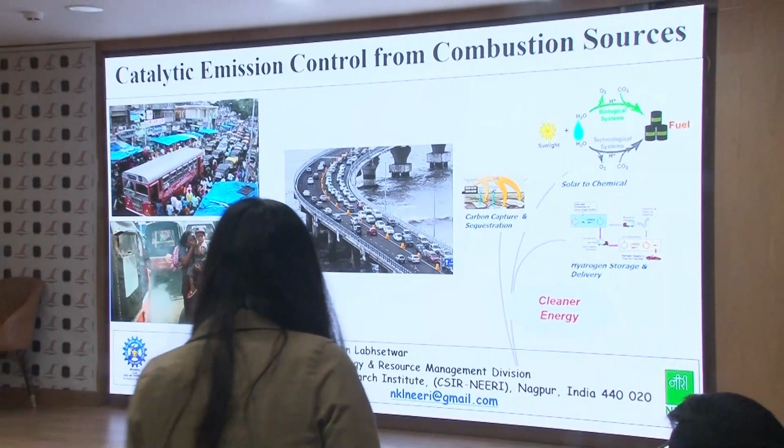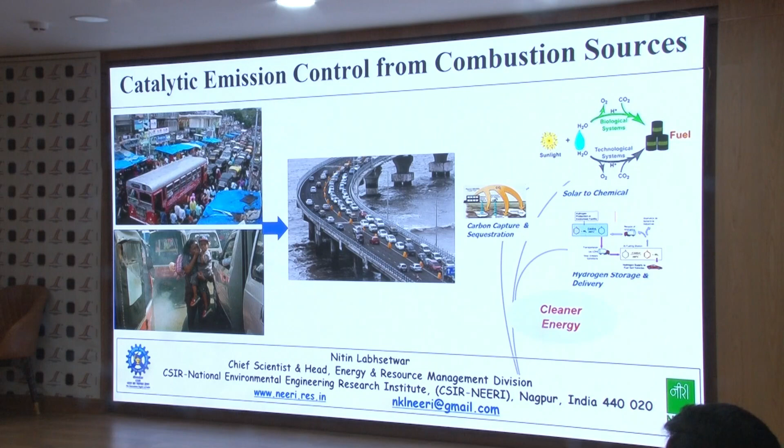And my presentation is influenced by two things. One is I had some discussions with my dear friend Avinash, and we were discussing that we should also encourage the collaboration from my institute. So I changed my presentation towards introducing what my other colleagues are also doing, number one.

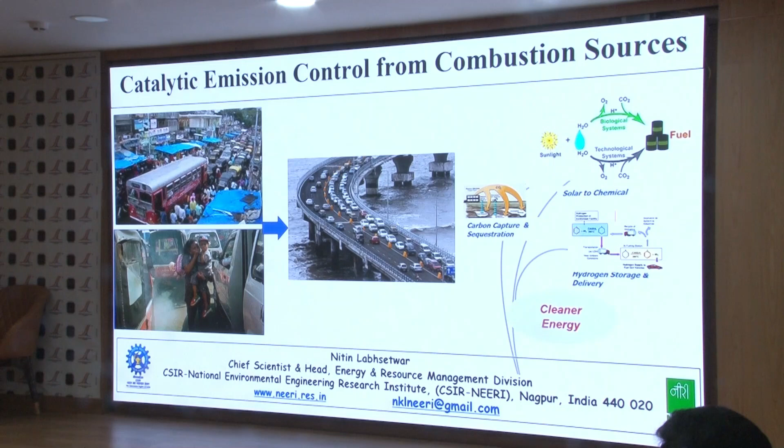And number two, I believe in two kinds of collaboration. I am a material scientist, worked on catalysis, so I collaborate with catalysis scientists, and other collaboration like with Professor Avinash, wherein we look for the complementary expertise. So that's why I haven't written anything on my sheet, but we'll take care of mostly emission related things. So this is what my perception will be from a point of view of my institute.

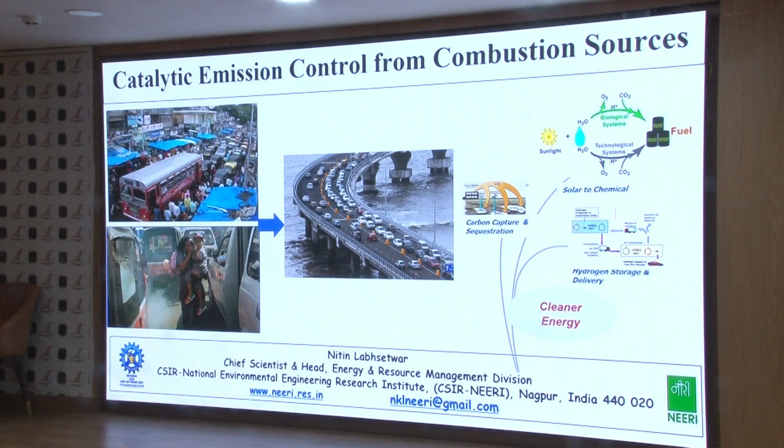So my institute, I'll very quickly introduce as an environmental engineering research institute, wherein we are working on different aspects of air pollution.

We can continue. We are trying.

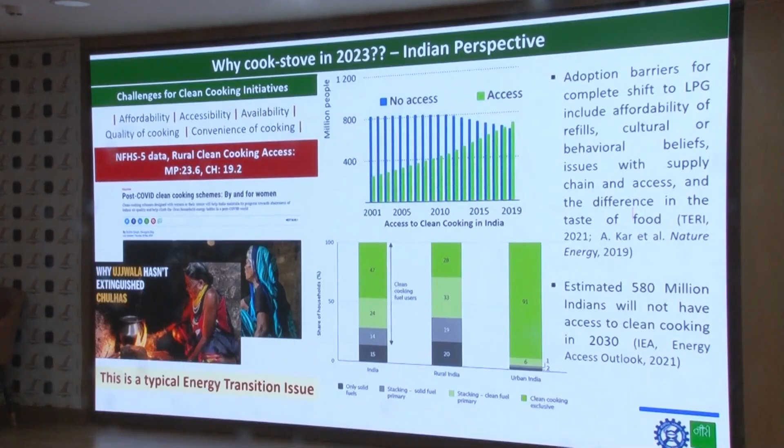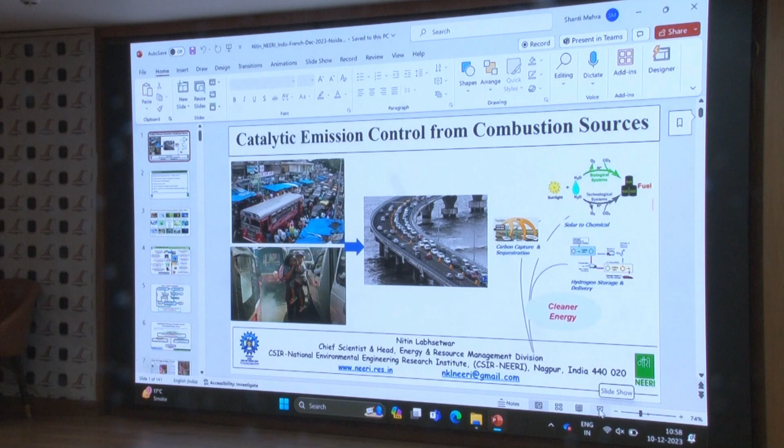Or not very specific to the automobile emission control. So I would like to show you what we feel as a neutral person or as an expert in the area of environmental engineering or air pollution control, not exactly the automobile pollution control.

Fine, it works fine. Thank you.

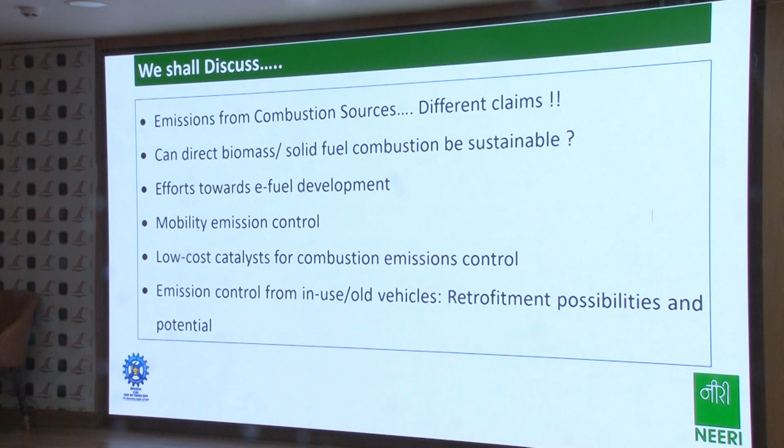So recently we started looking into the emissions from combustion sources, and interestingly there are different claims. Second, can direct biomass solid fuel combustion be sustainable? Because I'll show you the reason. Efforts towards e-fuel development at my lab and the mobility emission control. This is the area I extensively work on in fact. And we have done two interesting studies to check the emissions from the old vehicles.

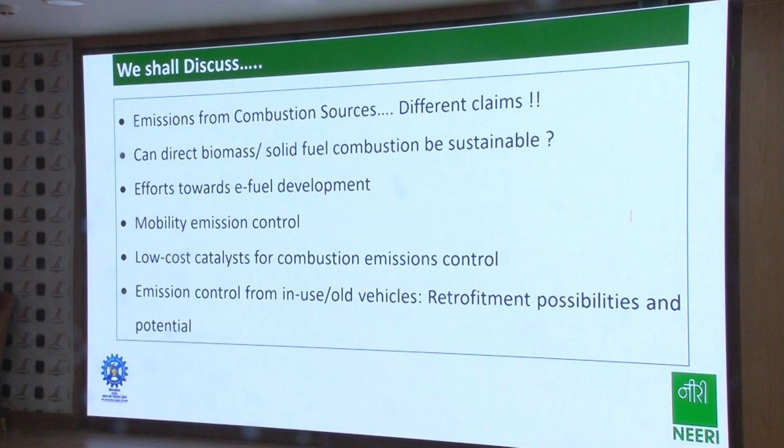So this is my institute. It's one of the CSIR labs. CSIR you can compare with CNRS France. We have 37 labs in different areas of research. So National Chemical Laboratory, National Physical Laboratory, so on and so forth. So my institute is dedicated to environmental engineering and environmental sciences. Obviously we have different departments focusing on air pollution and all these things.

Yes, so recently, about 8 years ago, we established energy resource management, because energy is one of the biggest contributors to the pollution. And then we have water, wastewater, biology department. This is the department or division I look after, and we have quite a few activities. I have been working actively on automobile emission control and something to do with the VOCs control or indoor air pollution. A colleague of mine works on fuel cell.

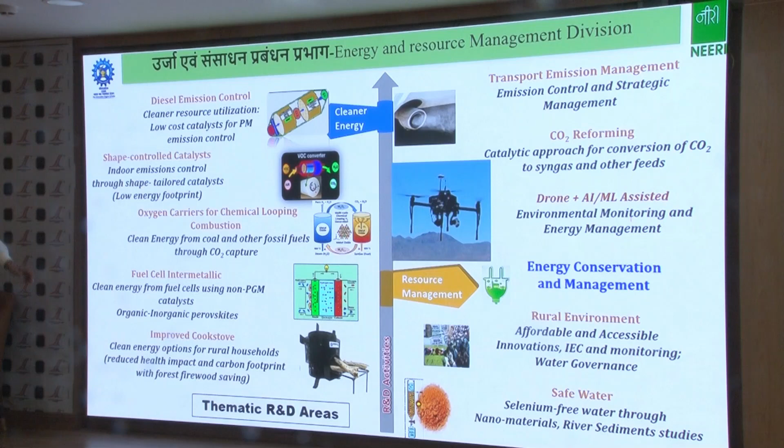This is something interesting we are exploring: chemical looping combustion, because we believe that for a short term, in Indian perspective, or mid term, like 20 years, the gray, blue, and green, all kinds of fuel will be there. And why not make the efforts? Then this is something interesting. We work on the cook stove, which nobody wants to work on today. A bit on the CO2 reforming, which would be of interest to this conference. And we are into a lot of drone AI ML applications as far as environmental engineering is concerned.

This is how we used to look into air quality management maybe 10 or 20 years back. And the difference was there was hardly any importance to the greenhouse gas emission, the climate change, and urban hotspots, while PM emission, I would say, is still a challenge. So quite often we have a debate whether the PM is important or the GHG emissions are important. Many of my young colleagues come to me and say they have been working on PM emission, but they want to work on GHG now. And the reason, you get grants easily on GHG.

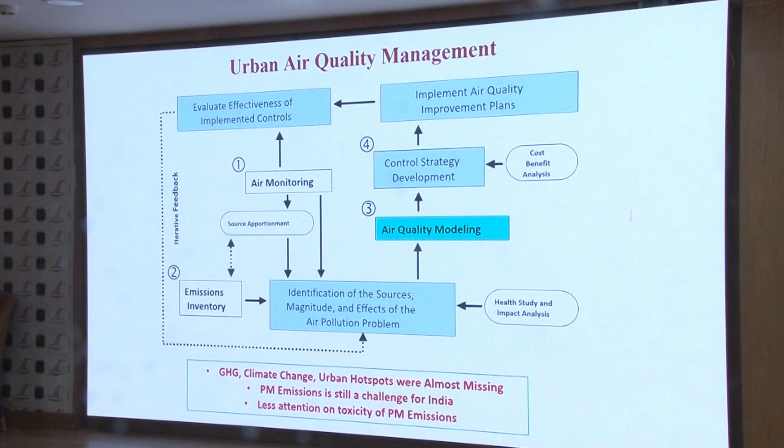While if you ask me, or you don't have to ask me, the big challenge of India today is the PM emission. Everybody knows that we have been facing a challenge of this thing. So the relationship, these are a few basic slides. So if you know that, please ignore.

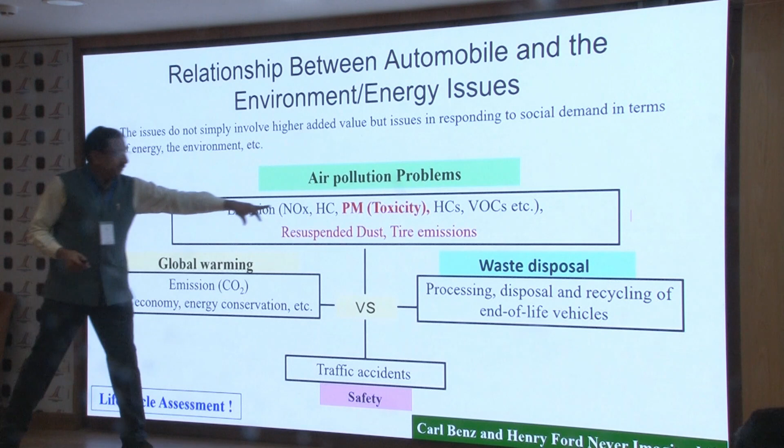This is how we perceive the relationship between automobile and the environment and energy issue. One is the air pollution problem, where we don't want to give less importance to the PM emissions. Of course, GHG is a big issue. Carbon neutrality is a big issue. The waste disposal, the global warming, and of course the traffic accident and safety. So a colleague of mine also works on the life cycle assessment of all these emissions.

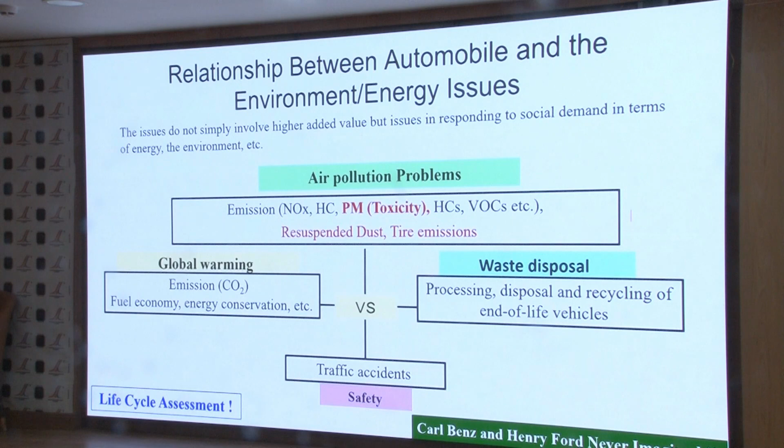And I'm sure you know the story of how the automobile engine was developed, wherein there was a lot of horse dung, and they said, okay, we are taking care of the pollution, and what it emits is a small amount of smoke from the automobile, which today we are struggling to control.

If you're not familiar, a couple of weeks back, this article was published, which was discussed in detail; it created a bit of a controversy, wherein normally in the month of November, we have a lot of activities in Delhi because of the pollution problem.

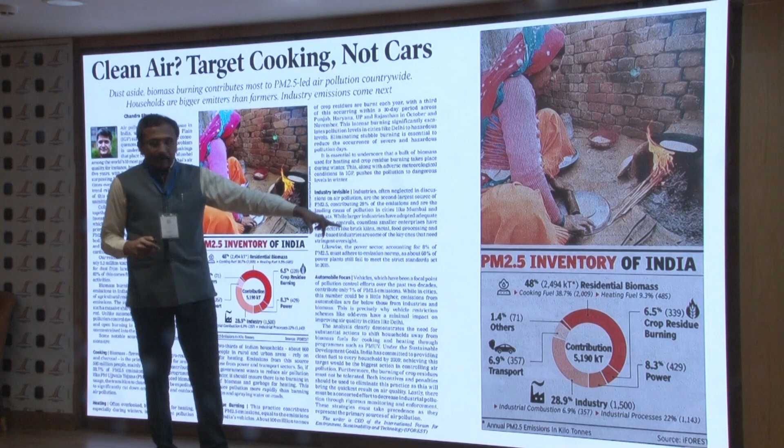This particular article from iFOREST and a couple of other sources says that when it comes to combustion-related PM emissions only, half of the contribution is from solid fuel burning, out of which about 10% is for heating and roughly 40% is for cooking. Close to 29% is for industry, 6.5% is crop residue burning, 8.3% is power, and transport is about 7%.

We have invested roughly 1 lakh crore Indian rupees on Euro 6, and the automobile industry as well as the government has done extremely well moving from Euro 0 to Euro 6 today. That's because that industry is very organized, with multinational companies able to control automobile emissions. So although we have to make efforts, this is one inventory distribution area we need to focus on. It should not happen that we ignore these kinds of emissions for the climate change perspective.

I work extensively on solid fuel combustion, and we know this figure could be 35 or 38, but not less than that for sure.

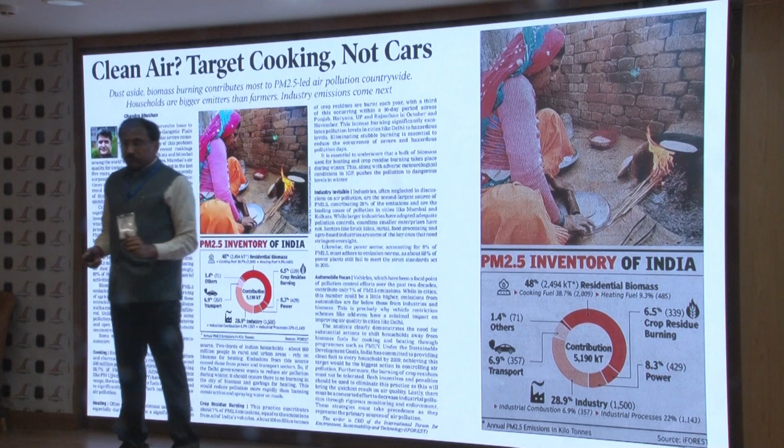As a national lab, we work quite actively. Although today we have a very impressive LPG program and electric cooking program, this is a typical case of energy transition. In any developing country, energy transition takes its own course—could be 10 years, could be 15 years. There's something called just transition, and we need to reduce emissions during the energy transition. We cannot expect that with solar growth, next year onwards we can shut down all coal-based power plants. This is an ignored area, but as per a very recent Government of India survey, Madhya Pradesh has 24% access to clean cooking fuel, and Chhattisgarh just 20%.

We look quite extensively at this because it's causing a lot of health damage and environmental damage. Another issue is black carbon, which also contributes to GHG emissions.

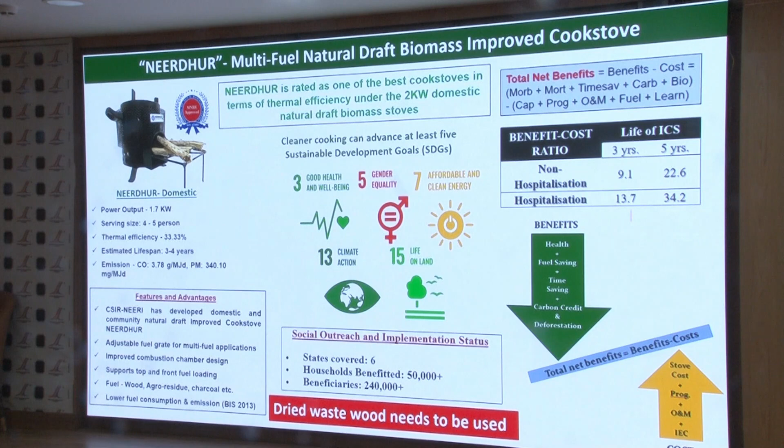So what we have done is develop our own cook stove. There are plenty of cook stoves in the market. We have already distributed almost 50,000, and the cost-benefit ratio is very good. In addition to other combustion sources, we need to comprehensively look into solid fuel combustion as well. Being a national lab, we are pretty much technology agnostic and fuel agnostic.

Recently in G20, we also contributed by highlighting the advantages of LPG, because there are many things to consider. For example, a report from 2 years back suggests there are 120 different pollutants from cook stoves, so we need to consider those pollutants as well. In the case of LPG, we also need to consider the other benefits.

There is a concept of FNRB, fraction of non-renewable biomass. If you consider biomass as a renewable fuel, and the latest cook stove technology gives you 45% or 50% efficiency, there are arguments that this is renewable biomass. Half of the biomass has to be utilized somewhere—pyrolysis is one of the best ways, but if you leave it, it leads to forest fires too. So we get a lot of pressure from the forest department to promote cook stoves and other solutions. This is a recent contribution from our group where we are trying to find out the answer.

The next work is what some of the groups related to our division are working on. We attempted water hyacinth conversion to pellets and briquettes. Here the challenge is we were able to convert it into suitable fuel for tandoors or other boilers, but we needed to blend it with sawdust or bagasse. If you do it that way, it works fine from both an emission and efficiency point of view.

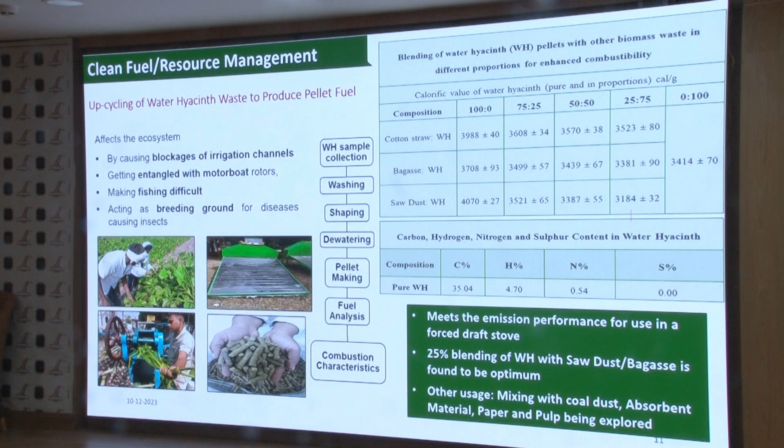The second thing we are working on is pyrolysis of bamboo waste. Bamboo has been promoted by the government, and there will be a lot of bamboo waste. There is something called the Maharashtra Bamboo Development Board and industry, and with their help we set up about 500 kg of bamboo biomass.

There has been lots and lots of research. What we are trying to do is try all three products - solid, liquid and gas - to work out which will give you what kind of energy input as well as money. So biochar is interesting; if you activate it, it has got some commercial value.

The pyrolysis oil, we have decided we'll just pass on to our another lab, Indian Institute of Petroleum, and they'll try to find out. Right now we are not working on the pyrolysis gas - we are just taking the details from the literature, and a colleague of mine will work on some LCA-based estimations of how it will work, with concepts like fast pyrolysis which we want to try.

So this is another area wherein we are looking into - probably we can call it an e-fuel - but some money can come from the biochar for sure.

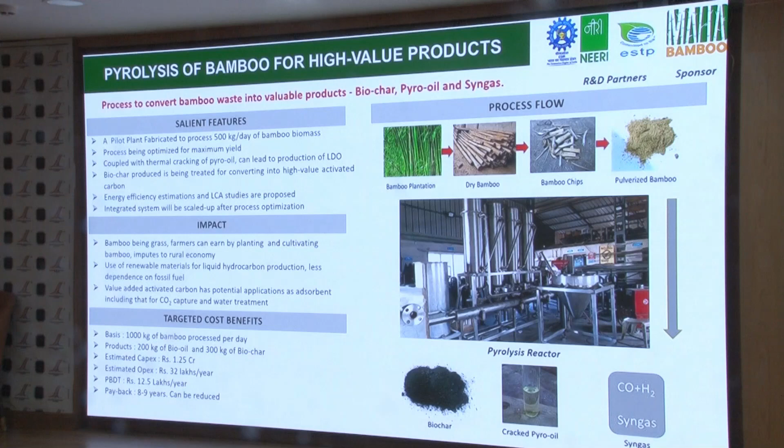There are two kinds of basics of catalyst materials. One is to lower the amount of noble metal, because they are very expensive. This is what most companies are doing, and most have achieved a great amount of dispersion. The second, mostly restricted to lab work I would say, is a non-noble metal based catalyst. We are trying to avoid the noble metals.

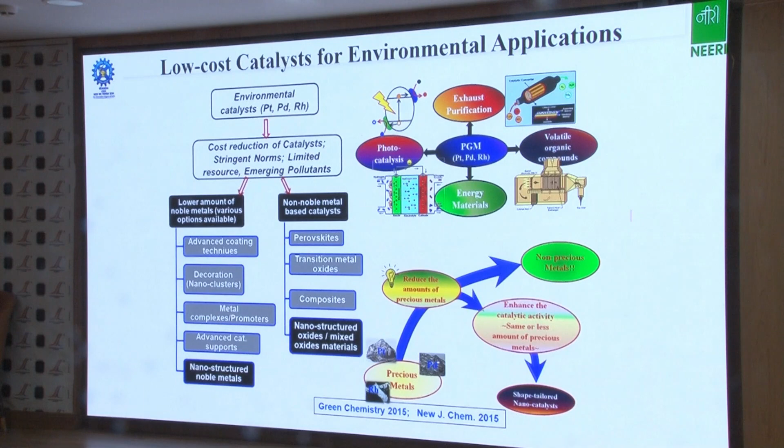I'll show you why it is becoming a little more interesting, because now we are talking about different fuels which might have different emissions, and we should have a good library. So this is one class of catalysts we work on - perovskite catalysts. These are completely non-noble metal based.

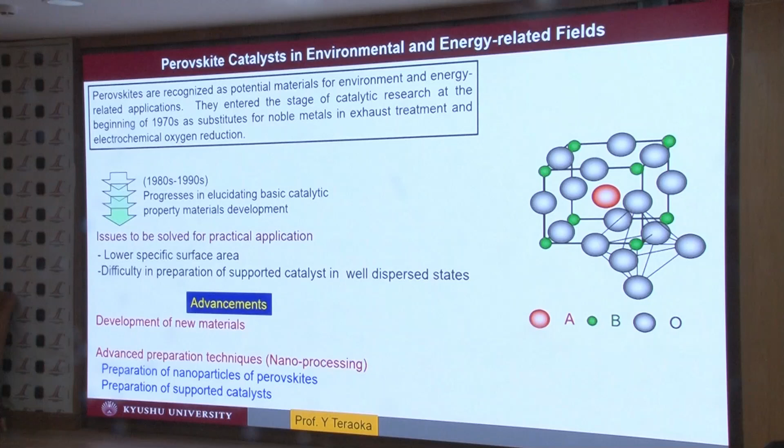As I completely understand, this is not a material science or chemistry gathering, so I'll be very brief about this. These materials have a lot of flexibility - you can play with the composition, you can play with the synthesis processes and so forth, and even change the properties. A large number of compositions are possible.

And many reactions it can actually catalyze, so there has been a renewed interest in this class of materials. There are a couple of challenges though. One is the surface area is very low, which is why this class of materials was not very successful in auto exhaust catalysis. The second problem is it is susceptible to SO2 poisoning.

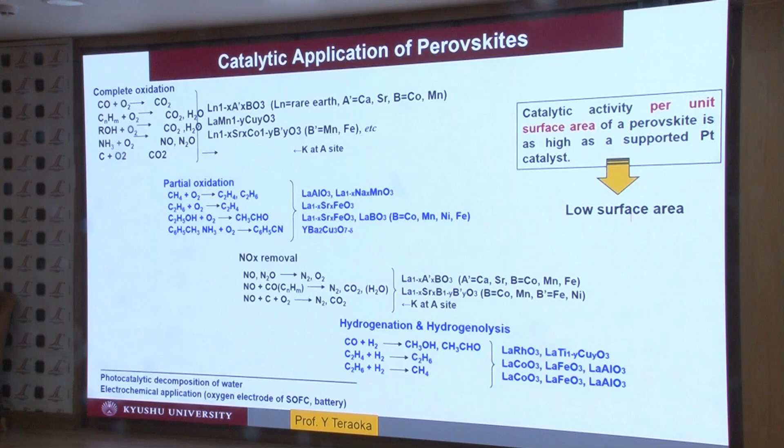But with sulfur content going down, and with a new category of fuels, probably people have started reinventing or reworking on this class of materials.

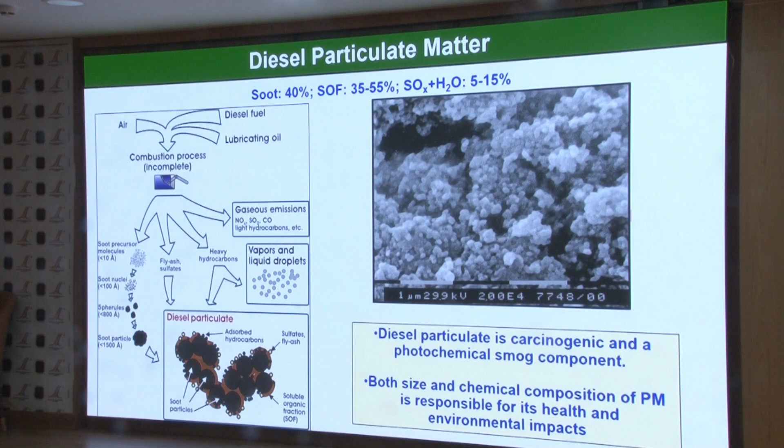So this is very typical, you know better than me - this is how it looks like, the soot. In fact, I have seen some very interesting pictures of diesel particulate matter.

There are two technologies commonly known. I'm sure Dr. Shaktivel and all are more than familiar with this. One is a diesel oxidation catalyst, wherein we expect - this is a typical soot particle where its soluble organic fraction is hydrocarbon, then there is sulfate and all this - so this condensed gaseous mass can be catalytically oxidized.

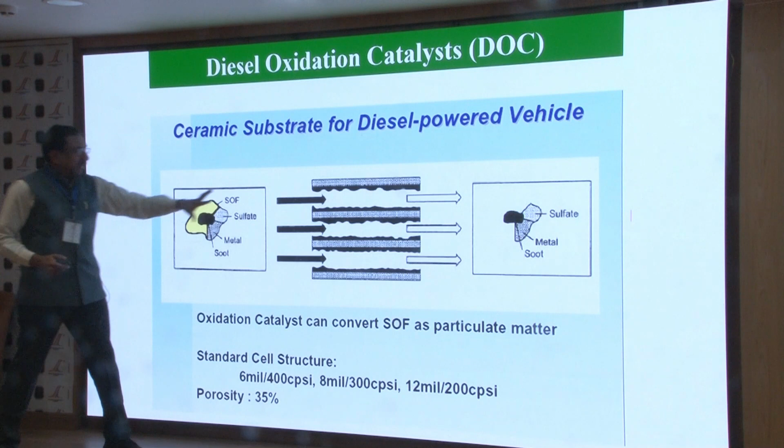So if you have 40% SOF, your efficiency can be maximum 40%. If you have 20% SOF, only 20% will be the efficiency. This is typical like a gasoline catalytic converter - you have a catalyst coating here, the particle is passing through it, and it will only remove this soluble organic fraction. The advantage is back pressure is almost negligible. It's a low cost device, but the efficiency is around 20 to 40%.

The next, very efficient device is the diesel particulate filter. All of us know that filters with efficiency of 95% are available - you can just buy it and fit it. The challenge is regeneration; it requires regeneration, for which the temperature required is close to say 550 or 650 degrees Celsius.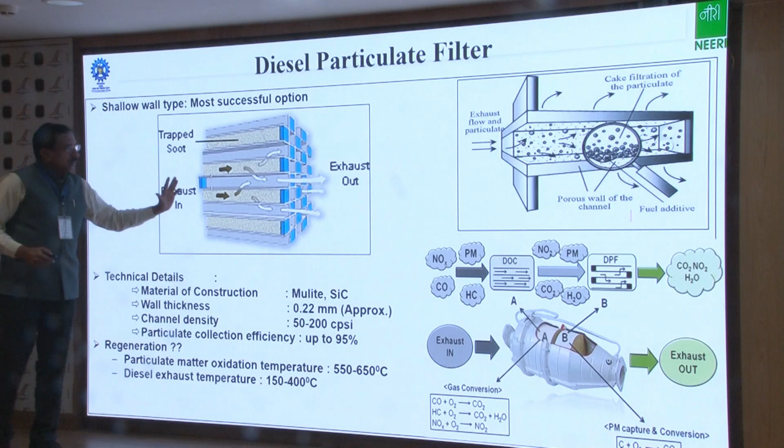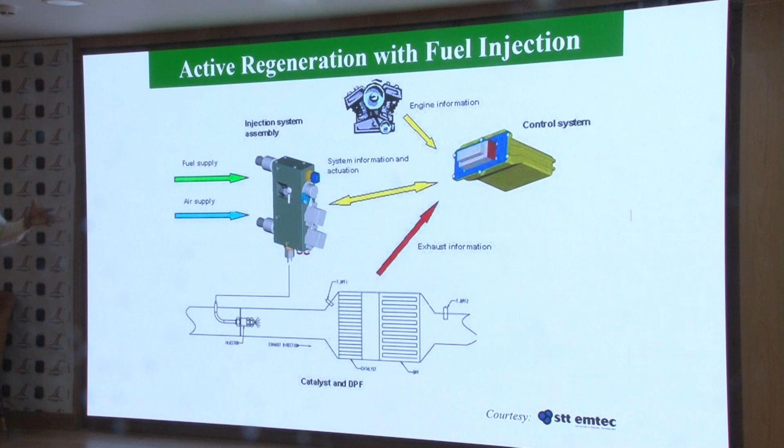NO gets oxidized into NO2, and this NO2 reacts with the soot, and you get regenerated DPF. These are two very typical processes for regeneration - active regeneration, where you introduce a fuel, but there will be a fuel penalty and CO2 emissions also. So catalytic regeneration is always preferred because you prevent the fuel penalty otherwise required to heat up the DPF.

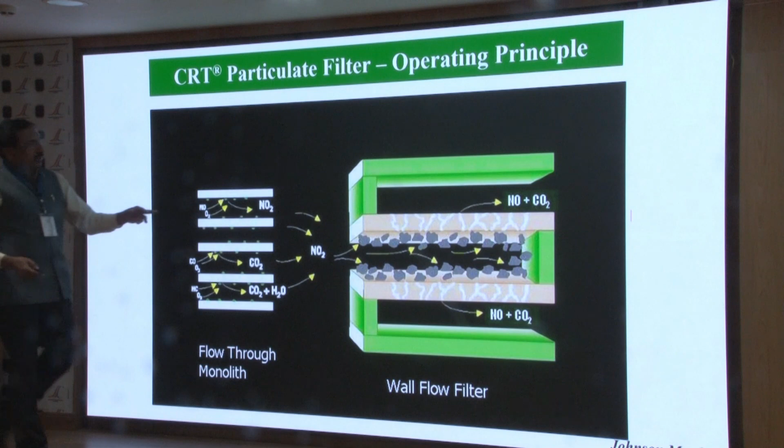This is how it works. You have NO, you oxidize it into NO2, and the kinetics of NO2 plus soot is very good at a lower, even moderate, temperature. So you again get NO plus CO2, and this NO can be taken care of by selective catalytic reduction, SCR.

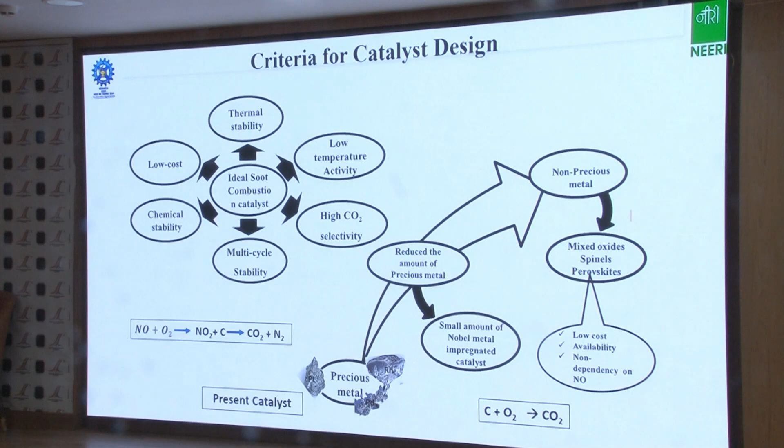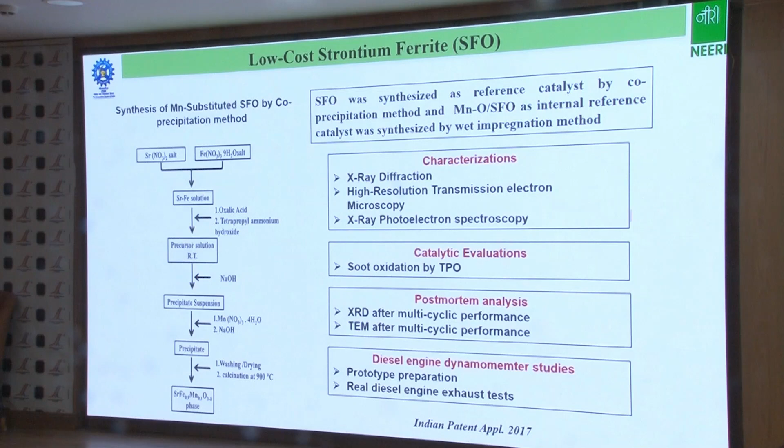This is a typical criteria - it's a very tough application. You need chemical stability, thermal stability, high surface area, and so on. So we work on these kinds of compositions. This is one composition we attempted with just 10% of the amount of noble metal.

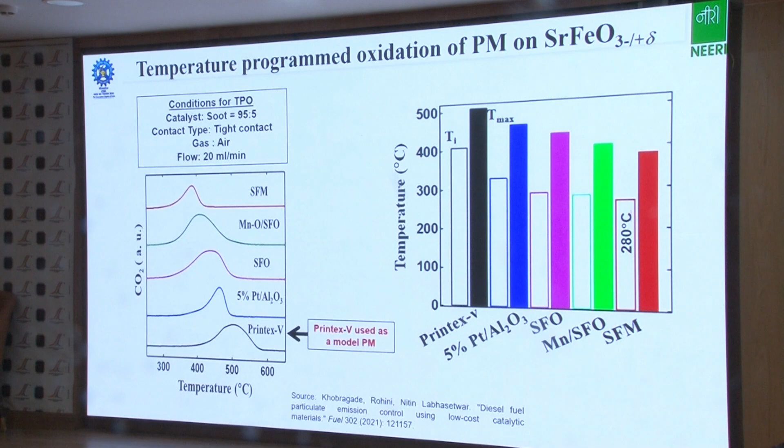So we do a lot of characterizations like XRD, temperature programmed desorption, temperature programmed reduction, which is commonly used for catalyst characterization. I'm skipping this because it's a bit of chemistry which may not be of interest to you.

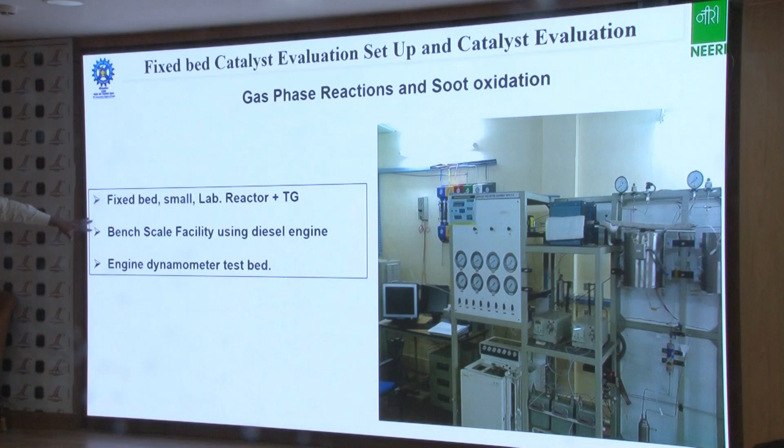So we go for three levels of evaluation. First, using this fixed bed small laboratory reactor where we basically screen our catalysts - 10, 20, 30, 40 catalysts. Then we use a next level bench scale facility, and third is an engine dynamometer facility.

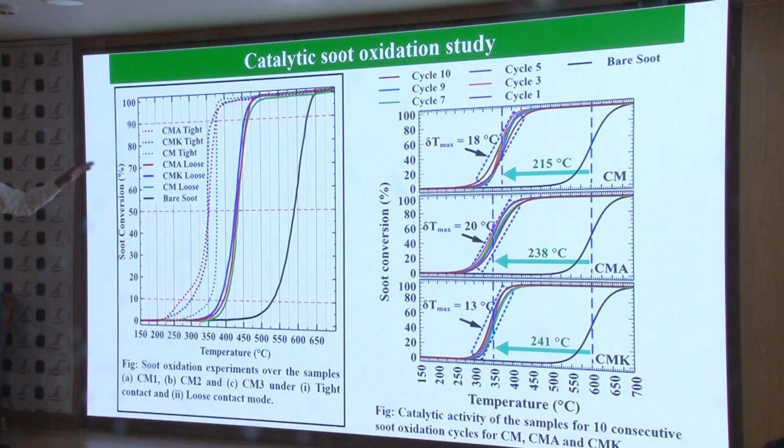This is the kind of curve we get. Without catalyst, soot is burned at about 500-550 degrees Celsius, and with catalyst it is around 300 degrees Celsius. You can use thermogravimetric apparatus or the testing apparatus I have shown you. You work on mechanistic aspects - why it is functioning in absence of noble metal, and so on.

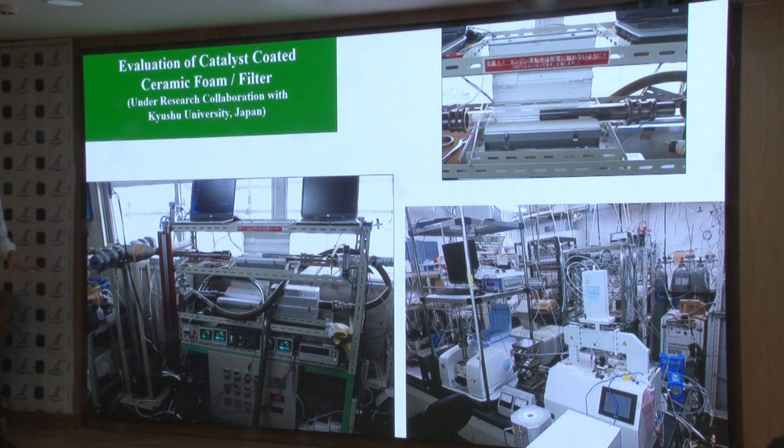The next facility I use is from Kyushu University, where we have a bench scale facility with a small diesel engine, and here we can keep a catalyst coated support and measure the CO2 and other emissions. We are also trying some operando studies wherein we try to explain the mechanistic aspects.

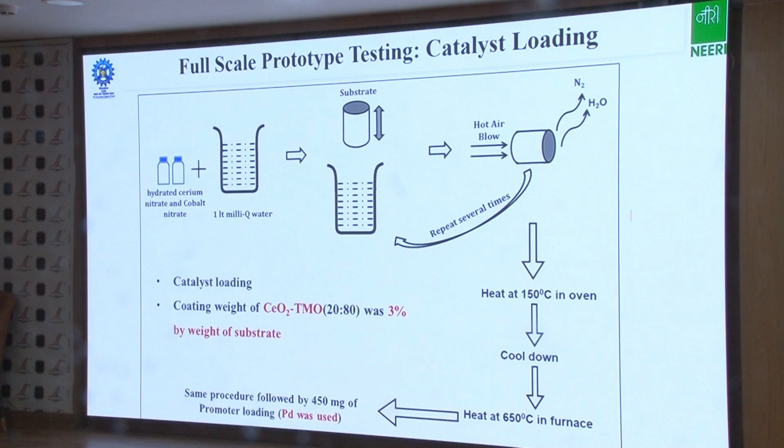Third, after screening, we shortlist one or two catalysts and go for the prototype preparation. We use a simple dip coating method. This is how it looks after the canning and all.

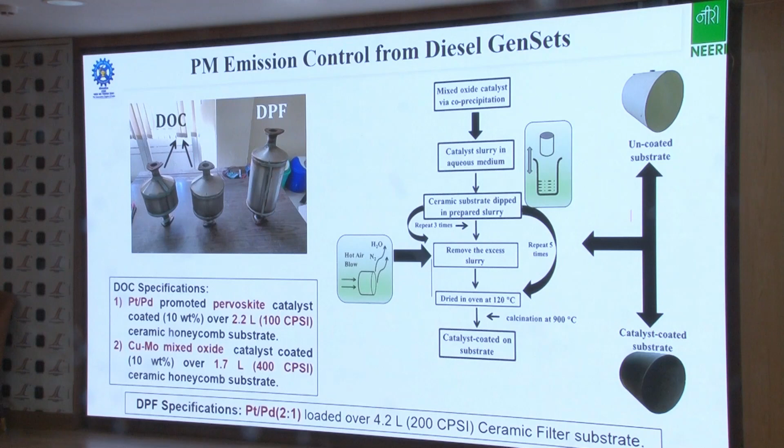There are two sets of results I can show because of shortage of time. This is two DOCs we prepared, promoted by very small amounts of platinum and palladium. The size was a 2.2 liter substrate, and one was around 1.7. In combination, we also used a ceramic filter.

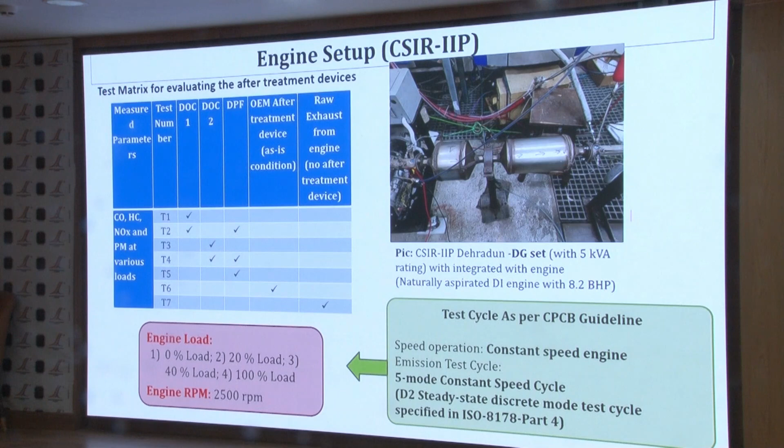There was a project between IIP and NEERI wherein we tried to test it for the DG set using a very small engine, a 5 kVA engine. These are the load conditions, and these are the results. For DOC plus DPF, percent removal for PM was also quite good without using significant amounts of noble metals.

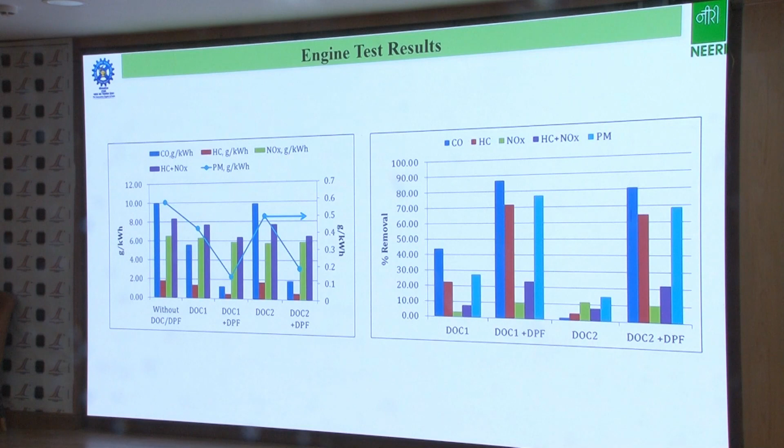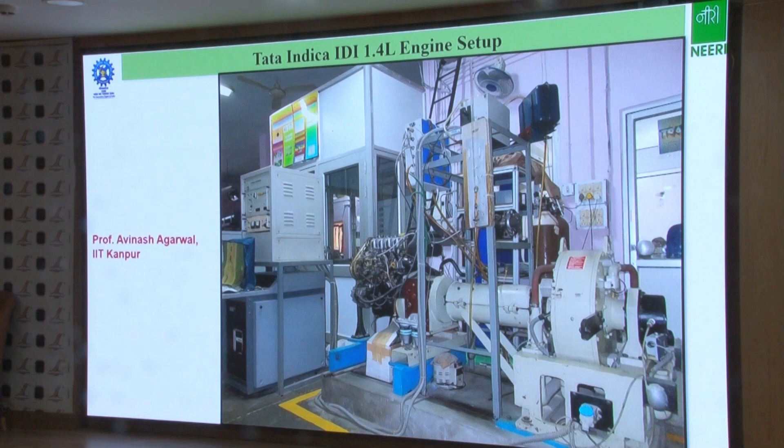So why do we want to use this kind of material? Not for new vehicles, because the efficiency requirement is very high, but for retrofitment, probably this can be a good solution where cost is a sensitive issue. So the first kind of trial we did was with Professor Avinash Agarwal's lab in IIT Kanpur, way back, and we were able to publish also.

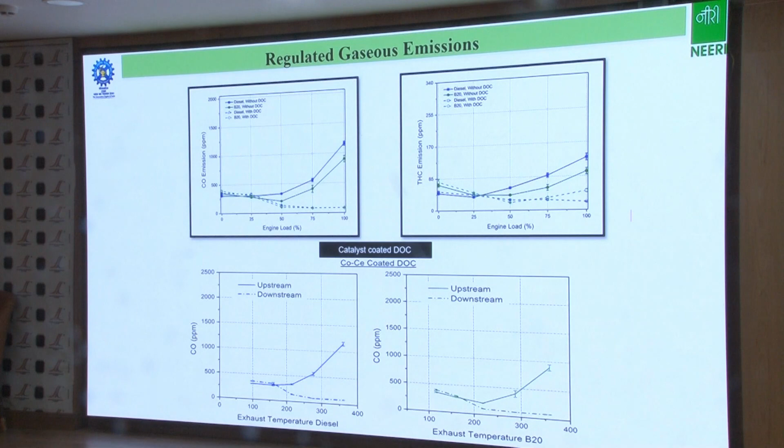The interesting part was he was probably one of the first to attempt B20 in India, and he was interested that yes, we should try B20. So this was very encouraging for us - using a non-noble metal based catalyst, we could reduce not only the carbon monoxide and total hydrocarbon, but even the particulate matter.

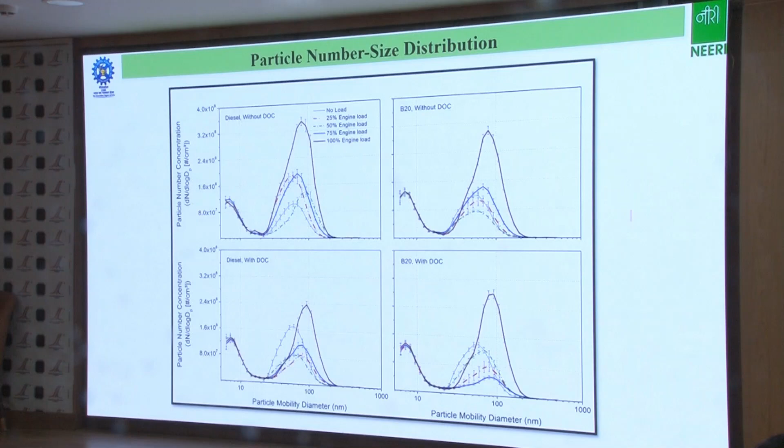It's only the first set of data. After that he has done a lot of work, and many other reports have also come. But this was a big encouragement for us that even using biofuels and probably futuristic fuels, we should be able to control it, and if required, design new catalysts - there's a whole set of compositions available that might as well work in this case.

The last thing is nowadays there is too much talk - I think we are already at Noida - so generally the issue is that Euro 4 vehicles also cannot enter Delhi, Euro 3 vehicles of course are out of question. There's a big debate going on.

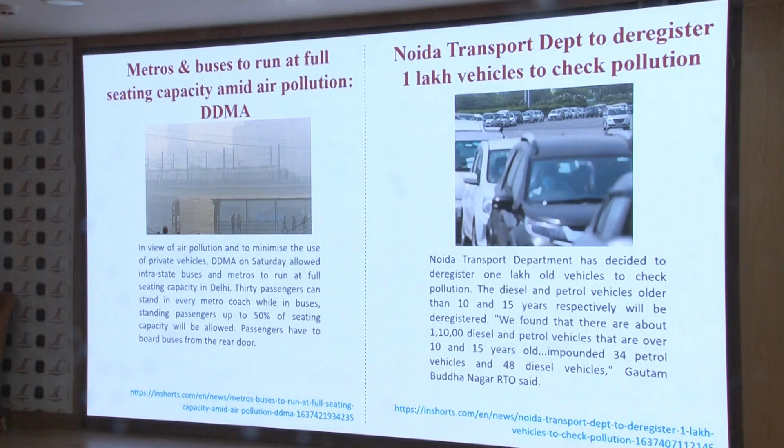Some say, let's throw out these vehicles. Obviously the automobile industry will be interested in new vehicles, but if you look at LCA-based lifetime emissions, the GHG footprint of vehicle manufacturing is also very significant. So it's not a good idea to do that.

Considering this, we started working on a retrofitment exercise, because we have close to 90% of the vehicle population which is either Euro 4 or below Euro 4. What is to be done with that? Because Euro 6 is quite clean, but we were not getting any significant improvement because 90% of our vehicles are Euro 4 or below Euro 4.

So these are some of the reasons why we feel that retrofitment could also be one of the good strategies, wherein we can target the most polluting vehicles which have already been identified, like the taxis which are emitting inside the city, because in addition to emission, we also worry about the exposure. So all these taxis and city buses are plying inside the city throughout the day.

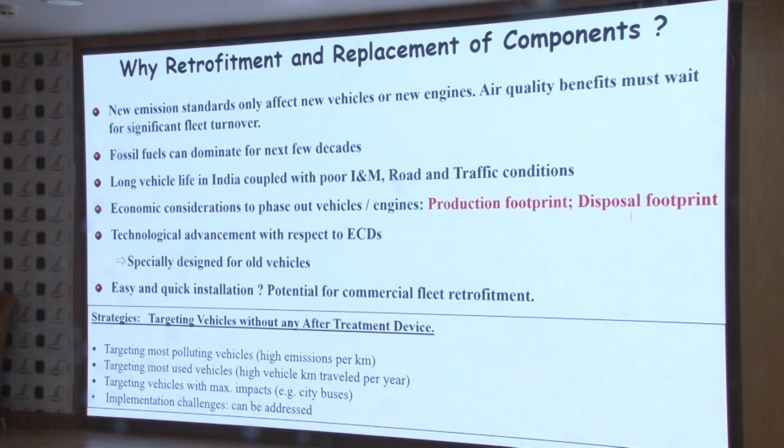So probably the first ever detailed exercise on retrofitment we did around 2008 with SWRI and Johnson Matthey. Majority of the contribution was from Johnson Matthey. To be frank, I was only coordinating. So this is a city bus which we identified. It was a Euro 2 bus, and we tried these devices with the help of all these manufacturers.

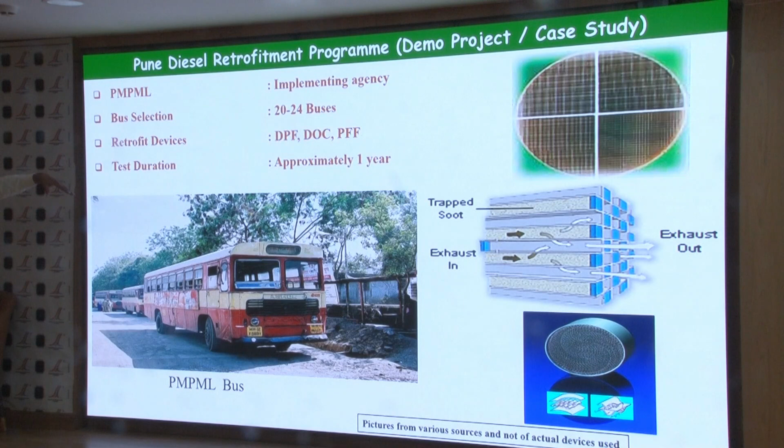The first challenge was, as just now somebody pointed out, the exhaust temperature. But the reason for low exhaust temperature was the traffic condition in India. So JM and Cummins and we put together, we measured the temperature, and it was a big challenge for them to design a device which can work at such a low temperature.

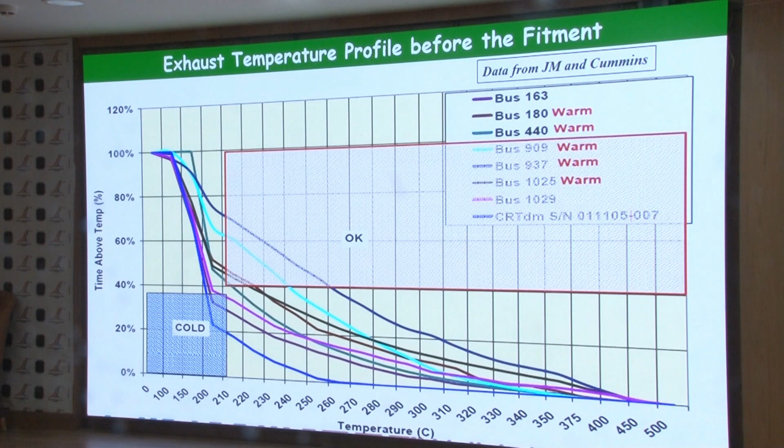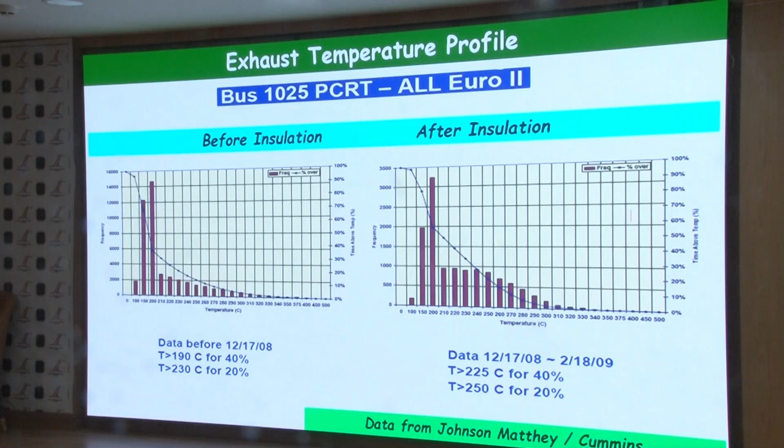So this is one concern about the retrofitment as well as for the new vehicle, because your exhaust temperature is quite low. Majority of the time you get 200 degrees Celsius, while for DPF catalyst, you need at least 250 or 260, best of the catalyst. After we did some kind of insulation in the exhaust, there was an improvement of about 50-60 degrees Celsius, and then we tried and we retrofitted these kinds of devices.

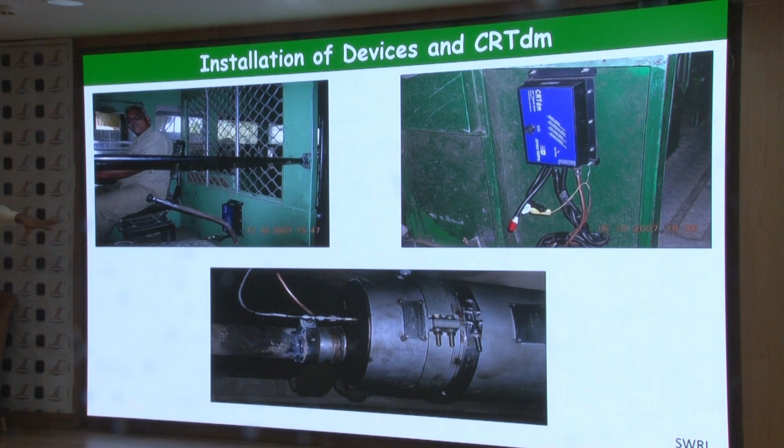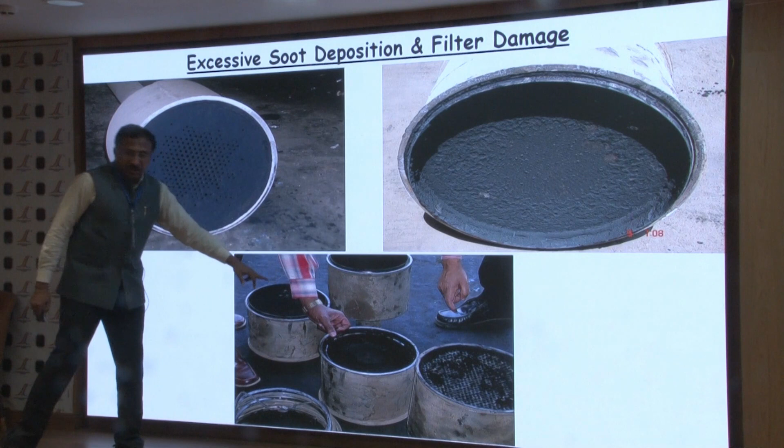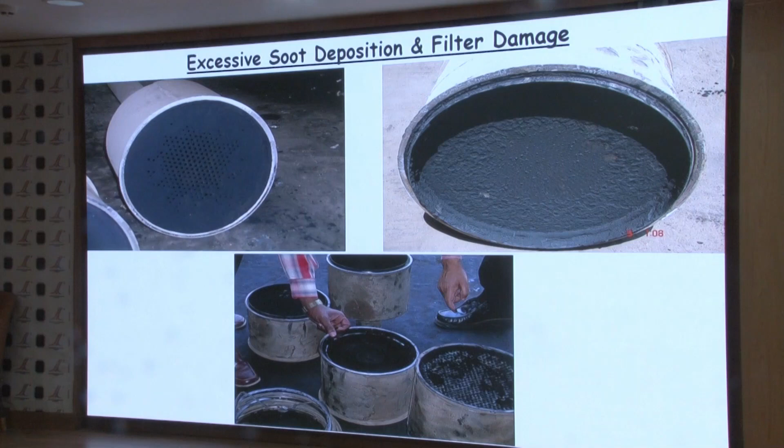We put a lot of artificial load into this, but this is the state of the DOC and DPF after a few days of running. It got damaged, this thermal damage; we checked, the temperature was around 1100 or 1200 degrees Celsius. Not only because of the failure mode, but the localized burning of a huge amount of soot. So these were very big challenges. So we clearly recommended that the Euro 1 vehicles were not really suitable for retrofitment, although there was a lot of interest from the US trade agency.

Now there was another project recently given by the MoEFCC, Ministry of Environment, Forest and Climate Change, which we are coordinating with ARAI, wherein almost all vehicle manufacturers, ACMA, are interested. And again, we are trying new devices. In this case, the target was 50% PM reduction. We got up to 65% in one combination of DOC plus DPF.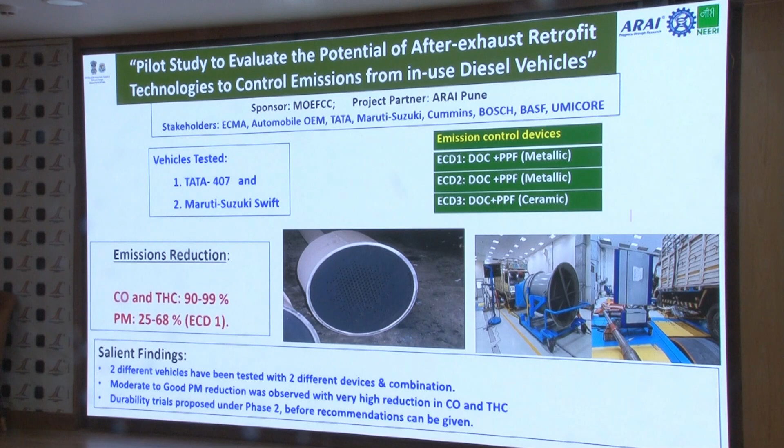So now we propose that this is not enough. We need to do at least 6 months of durability trial, based on which we can possibly recommend that some of the buses of Euro 4 or Euro 3 can be retrofitted. And the cost we worked out should not be a big problem.

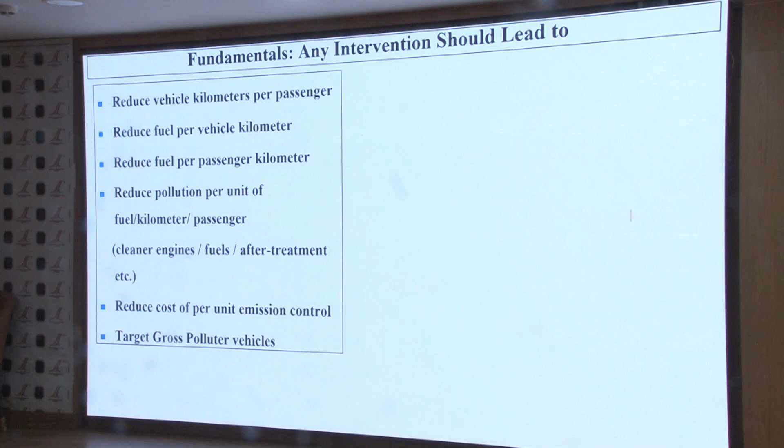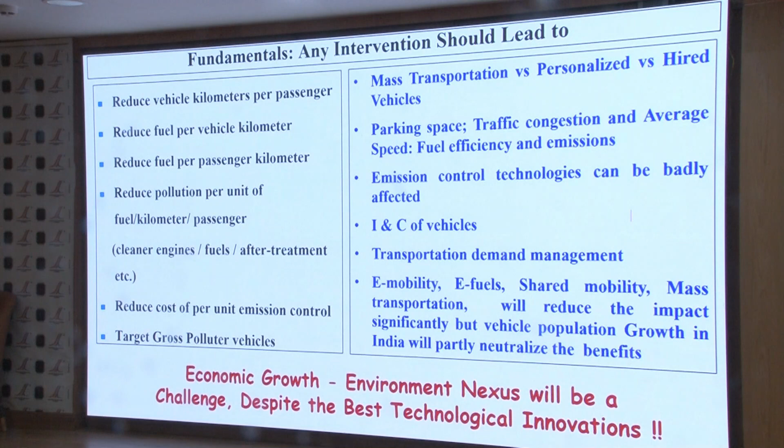So we normally believe that these are the fundamentals on which we need to work as an environmental engineering institute. We need to reduce vehicle kilometers per passenger. There should be proper town planning and all these things. This comes with a lot of developments and improvements in the technologies. So I consider this a typical economy-environment growth nexus, because obviously the automobile industry will look for more vehicles, but there will be a limit in terms of exhaust temperature and other things.

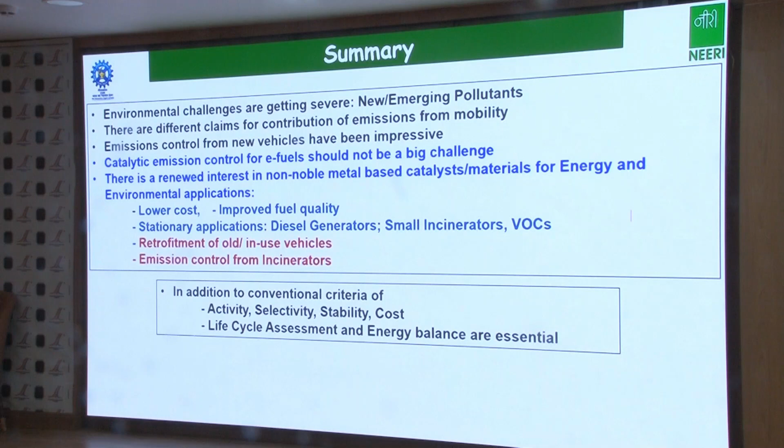So in summary, the environmental challenges are getting severe. There are a lot of new and emerging pollutants we encounter, not really from the automobile, but from many other sources, as I explained. But a very good amount of technological solutions are available, wherein there's a very good possibility we can take care of both GHG emissions as well as conventional pollutants. So we shall be really glad to collaborate in the emission control domain.

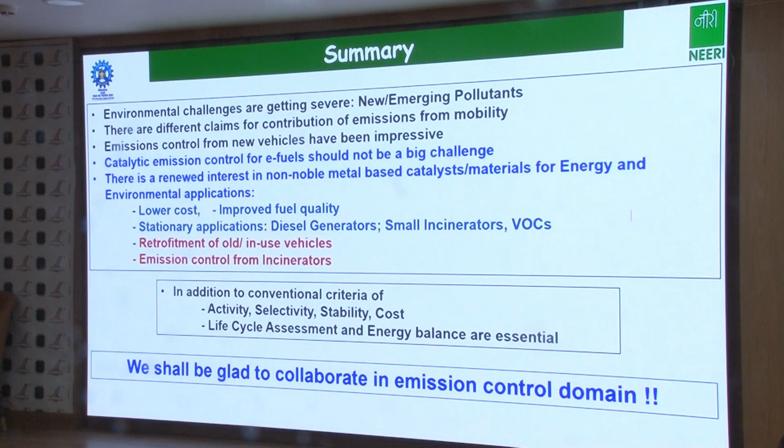Absolutely. Efficiency is the buzzword today. Everybody has pointed it out, the kind of efficiency we have, be it electrical appliances or automobiles. Automobile is slightly better because we are directly combusting the fuel. But one is efficiency, and second, we need to find ways for mass transport.